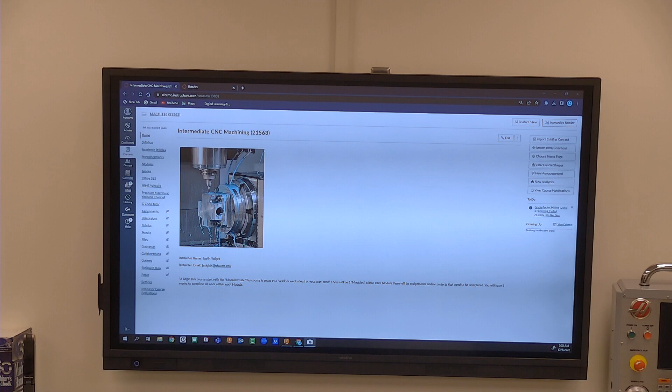For 118 today, we're going to be working on Module 4. This is going to be the legacy milling, and I will have all of your modules for the rest of the semester out today. So in this module, I've given you a Fusion file, a regular STEP solid model file, and then I've given you a DXF file that you can import into AutoCAD or anything, and it's just kind of a little more stripped down.

So if you've already had some type of CAM class, then this program becomes really easy for you. Whether you're in Fusion or in Mastercam, you can import this directly into that program. Chance, have you had Mastercam? Okay, have you had anything in Fusion? Okay. Then we'll go through some of that stuff together.

What I'm asking you to do is import this model into Fusion or into Mastercam, and then you can create the program off of the machining operations that are here. Okay. But remember, we only have 2 weeks left of class, and that's really less than 2 weeks. Okay. This is a primarily mill part. You need to be working on this part while we're working on the other parts.

Today, we'd like to go ahead and start putting some holes in our other part, right? So you actually have 2 parts. 1 part to make 6 flats on, and 1 part to make 3 NPT holes in. Correct? Okay. So you're going to create a taper gauge with handle for this part. This is the part.

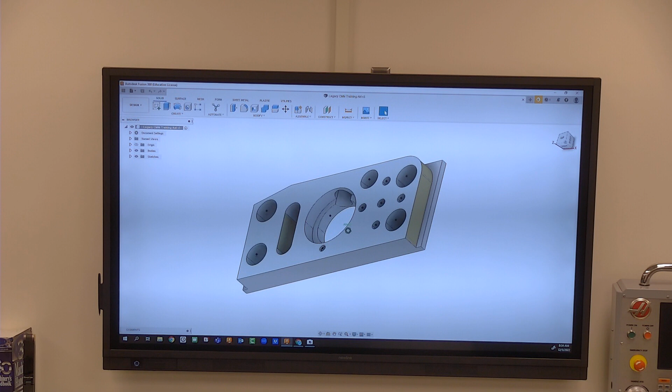And it is about 9 inches long. And so you'll mill all the way around it. It's got a side hole that comes through it here. This hole right here is tapered. What I want is something similar to a go, no-go gauge that has that correct taper on there, which you'll turn on the lathe.

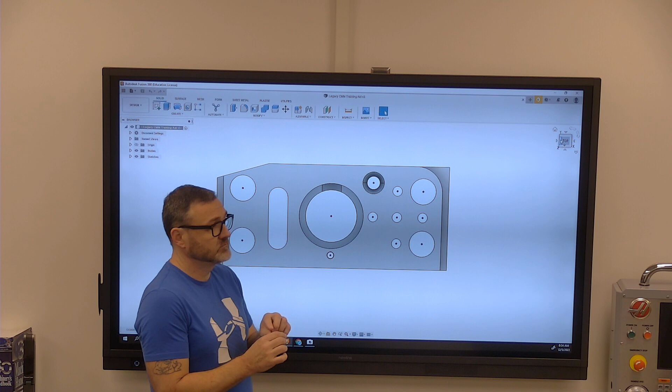I want you to make it out of one piece. You can knurl the handle. It could be tapered, and then it could be undercut, and then have a handle on it, however you want to make it. It needs to be something usable. So it's for Jacob's class next semester to use as a tapered gauge.

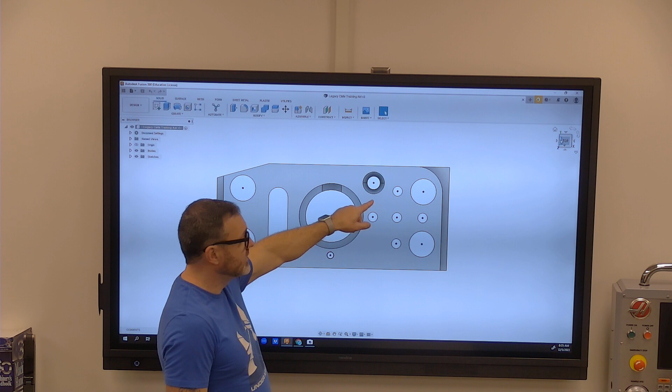Okay. So here's how I would do this: I would make sure that when the taper is correct, the bottom of the gauge fits flush at the bottom of the part. This is how you know it's right. You'll know that bore is too big if the gauge sticks out the bottom. You know the taper is too small if the gauge doesn't go all the way down to the bottom. See what I'm saying?

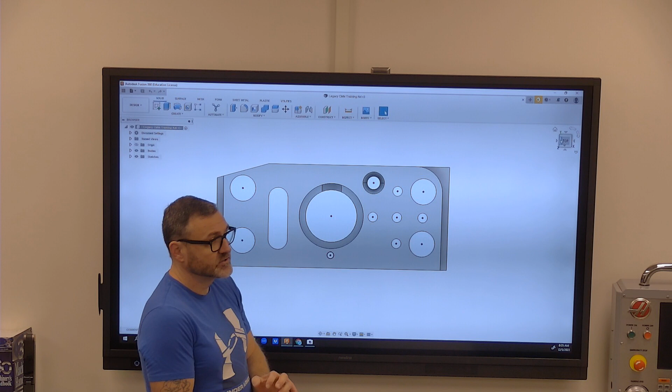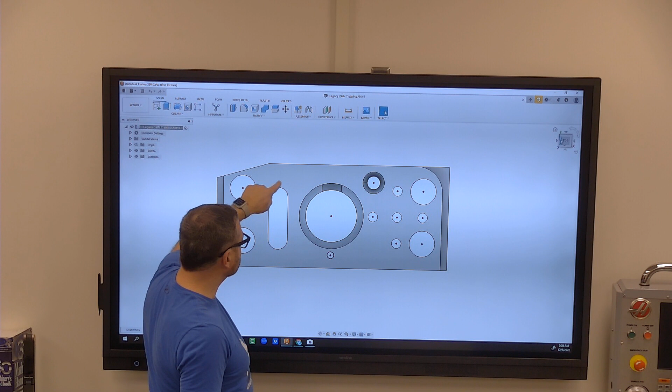So with this part, there's really not a lot there. It's just a lot of holes, is all that it is. Okay, so you're gonna have a part, and like I said, it's about 9 inches long. You're gonna mill some steps and a little curve right there. Square the outside, mill this angle. Then you've basically got holes, 4 holes that are the same, 4 holes that are the same, a slot, a through hole counterbore, another hole here, stand it up on its side, and do this last hole.

Okay. I think the part is about 900 thousandths thick. I would try to take material off both sides if it were me. You can get away with just taking the material all off of one side on this part if you want to. Okay. So I think this part's going to need, you've got to do it in 2 setups, right? There's just no way to do it in one singular setup because you have that one side hole.

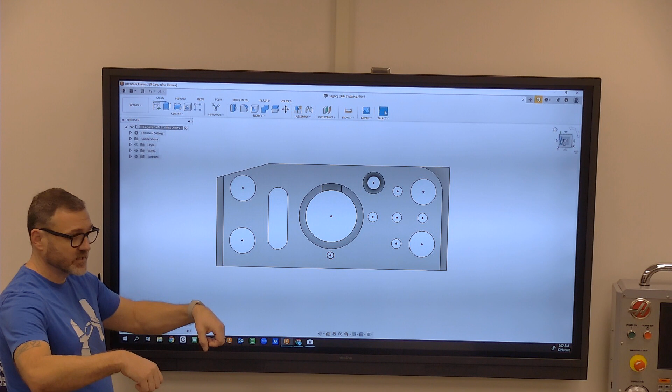Unless you build a plate to put on the 4-axis where you can rotate it up and pop that other hole in it. See what I'm saying? So you come out of that 3-jaw chuck, and basically you have a rotating plate, and so you mill the whole thing on the plate, rotate it up 90 degrees, drop that hole in it.

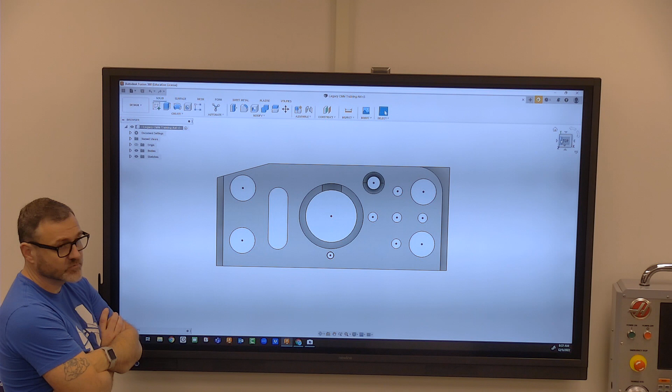Okay. So I think what we'll do today, we'll focus on getting our A-axis stuff going. And then, Eden, you can do yours in Mastercam if you want to. I'll probably just help you guys through some Fusion stuff to get that going, okay? Because I want you to do a little bit of CAM stuff in here, just because it's going to be a little easier to do, really. But it's a little bit of a learning curve.

What do you need, or are you just distracting? I'm just in here. Okay. I'm taking like 300 thou out per cut, but it's slow. Slow, yeah. Got the grinder running? Do what? Got the grinder running? I don't have any more parts to grind. Okay. Got your lathe parts done?

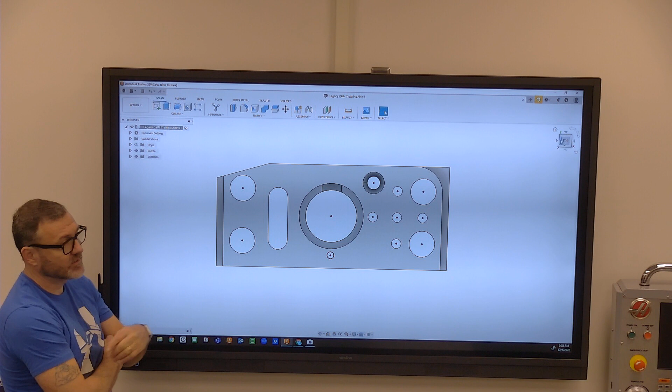Do we have material for, well, I probably still need, I only have to do the screw. Screw. Okay. Yep, screw's just mild steel. So there should be some 1 inch on that. I may have some bushings that you can put in the end of it, so you'll have some Oilite bushings to run on the ends of it. Have you already got your holes done on the ends? Okay. So we can do those then. Okay. I gotta do these guys, and then I gotta do the Jacobs, and then I'll grab you.

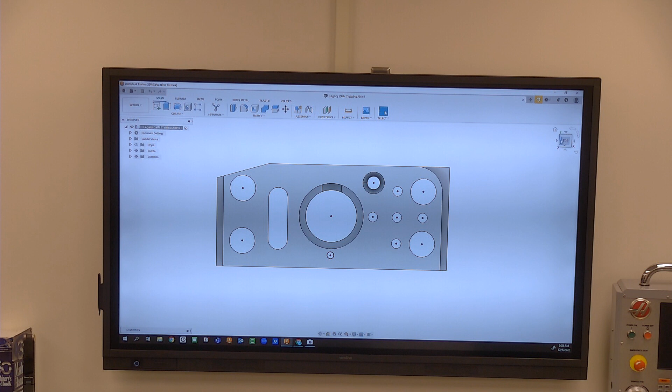All right, so let's talk. So this is the next module. Okay, so Eden, this is probably the easiest part for you. So create a taper gauge with the handle, create the CNC program using either CAM, conventional, handwritten code, or a combination of both. Finally, machine the part. Submit all prints, programs, and parts. A submission box is provided. Okay? So, pretty straightforward.

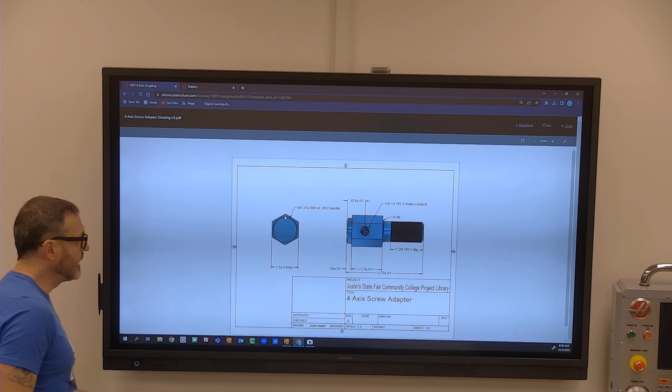Let's go back to our modules for Module 3. And the first one to work with is this guy. And we already came up with, or we think that we may have come up with, a scrap part. William was sure that it wasn't his. He assured me that he only makes good parts. So if we have a scrap part to make for our first part, it must be one of your own.

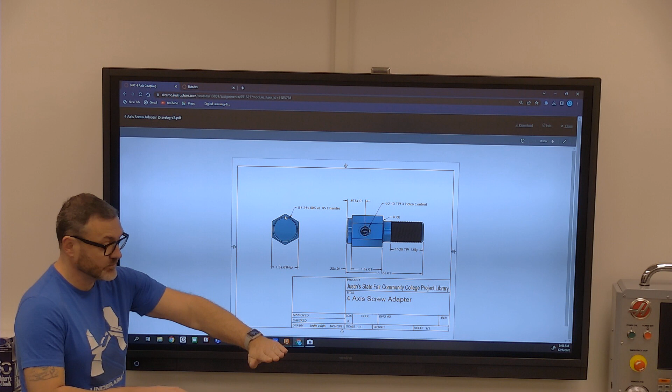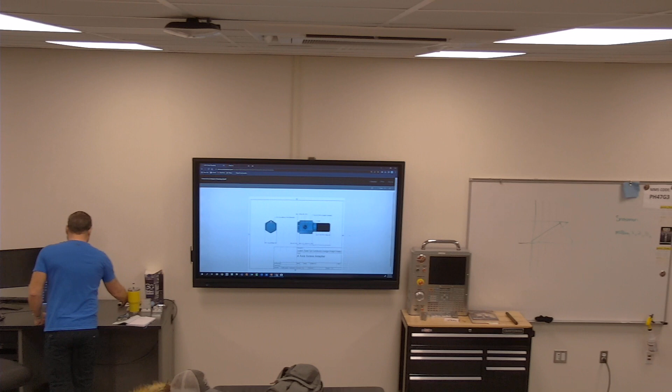So all we're going to do is we're going to put this part in that 4-axis chuck, okay? And then we're going to basically mill a flat. I would actually probably do it like this. Let me back up a little bit with the camera. You're going to put your part in there like this. This would be the threaded part. And you want to leave it outside of the jaws some. So something about like that.

Where do you think that X0, Y0, Z0 would be on this part? Very end. Yeah. So X0, Y0, Z0, top of the part. Be fine. You can also do it in the middle of the part. It's the same all the way across. I don't think it matters. So here's all that I would do. This is so simple, it's just ridiculous. Face mill pass, rotate, face mill pass, rotate, face mill pass, rotate. That's not how I was gonna do it, but that makes sense. It was super simple. Okay.

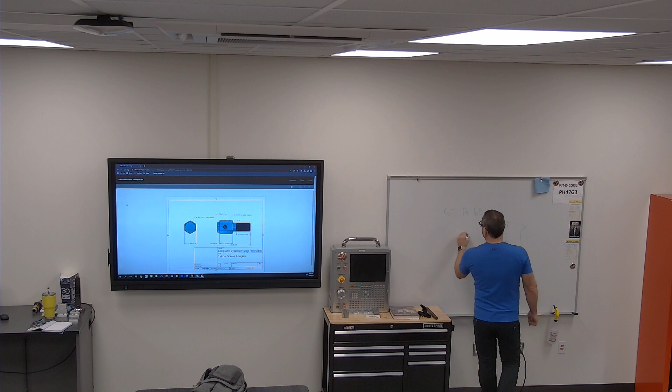Let's just say this is 150 thousandths arc. Okay, the arc of that is the chord. Let's just say this part is 150 thousandths. I would make this Z0. So I would go touch the top of my part and move down 150 thousandths, part 0 set. That way I can mill to Z0, and then after my flats are there, all my Z moves are negative after that. Oh, that would be when you're drilling?

Yeah. Okay. So then this part right here is then 850 thousandths from here to here. And so then I could run my drill down to the middle at 850 thousandths or whatever, however I want to do it. You can do that one however you want. If you do the center of the part at 0, you got to remember all these motions are positive. If you do the top of it, all the Z motions are negative. Only 2 differences between those 2 things. So that should not be an issue.

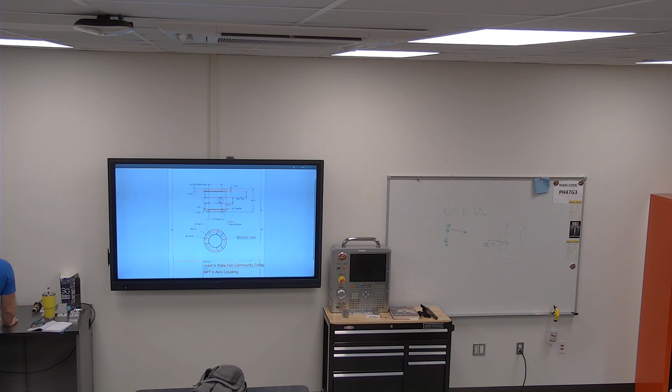All right, let's look over at your other part. So this one's real simple. You're just going to chuck it. Will any of the other modules require us to make a print to do what we're doing on this one right now? Other than the legacy one? So they're back to straightforward. Yep. Yeah, the legacy one's the only one I want you to do that on.

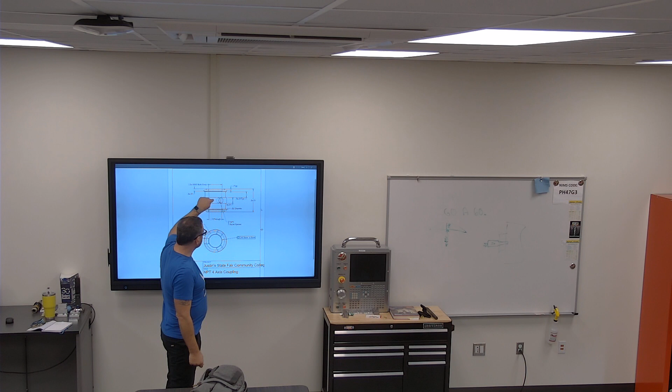Okay, this part, what do we need to do for it? Just rotate it and drill it, right? So it's going to be really similar, right? The only thing that we have to pay attention to is we're going to still do our same 3 rotations. Say X0, Y0 is one of these, Z0 is on the top or the middle, however you want to do it. You drill through it, rotate it, rotate it, rotate it.

Now here's what you're going to have to do on this one: your tap, since it's tapered, has to go to a certain depth. Oh, so it fully engages the threads. Right. Because remember that gauge I showed you with the flat on it? Mm-hmm. That's how you know when it's there. You get plus or minus a thread from the flat. So the threads don't go all the way to the center? Threads don't go all the way down to the middle. Okay. So that means you're going to have to do some calculation on the tap.

So there's a really easy way to do it. Let's say this is Z0. Thread it down 100 thousandths. Check it. If it's not right, thread it down another 100 thousandths, check it. You're like, okay, so I got 3 threads left to go. Say it's 14 threads per inch. Take 1 divided by 14. You'll know what each one of those threads goes to, right?

So like 20 threads per inch is 50 thousandths every revolution that it goes down. So if you can count those threads on that gauge, and you're like, I need to go 3 threads deeper, then you can know what each one of the threads are, and then go down 3 threads deeper. Okay, so if each one of those threads is 62 thousandths, then you need to go down 3 of those to get down to where you need to get to. See what I'm saying? Okay.

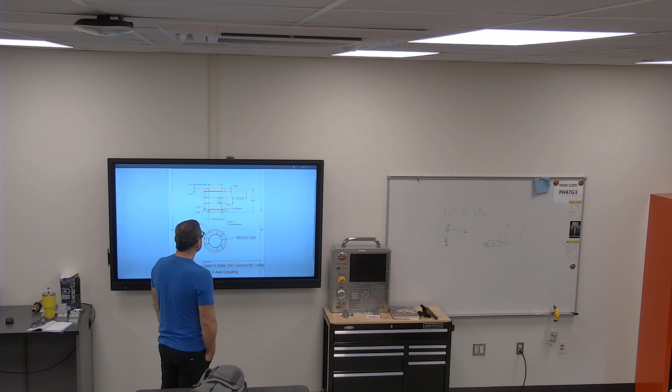Now, here's the only hiccup on this guy: there is not a way to hold on to this. So you gotta make something to hold on to this thing with. Shove through it. Yeah, so what I would do is find myself a piece of stock about 2 inches in diameter, and I would turn a diameter. We ended up going 1.2 on the through hole, I think. Is that what we ended up doing? Yeah, 1.2. So turn that outside diameter of that spud to 1.2.

We slide our part over it. This part is 2 inches long. We make the turned part 1 inch 900. You with me? That way it doesn't go all the way. And then we make a plate on the front of it. We tap a hole in the front of it, half 13. We put a plate on the front of it with a clearance hole for a half 13. And so we slide our part onto that spud, put the plate on there and then screw it on, and it pinches it in.

And then we'll be drilling into that spud. But then that spud works for all 3 of them, because you all need to make your bores the same. Okay. And so we've modified the print to be all 1.2 for the diameter on the hole. And so you just make them all so that they're 1.2. You make that 3 or 4 thousandths smaller. Just let it slide over it, and then it just becomes the one that you use for it all the time. All right? So like in the future, if I have other students make this, hey, here's this fixture that we already made to do this.

And then you just throw the trash right in front of them. You go, okay, now you can. Now you make one. Yeah.

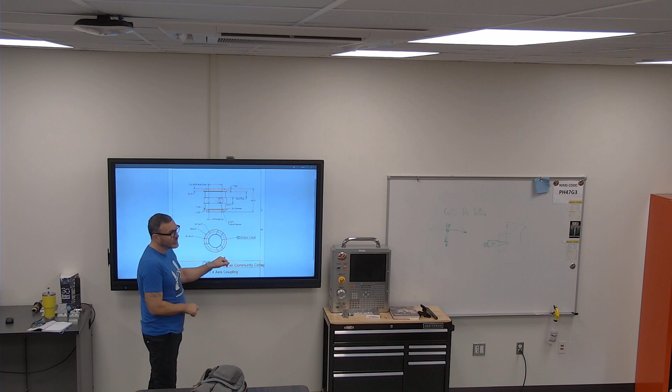So we want to sort them first, because I was thinking I would do all the lathe stuff, so anything that has a lathe application, do that and just save 4-axis stuff for next week, instead of taking my finished part right now and going in the mill and finishing it and turning it in. Since I'm already on lathe, I can do all the lathe stuff and start programming for the other modules. Yeah, so go ahead and work on your taper gauge today. Should I make that on a manual or just CNC? I'm making it on CNC, the CNC class. Makes sense. You can make your fixture too.

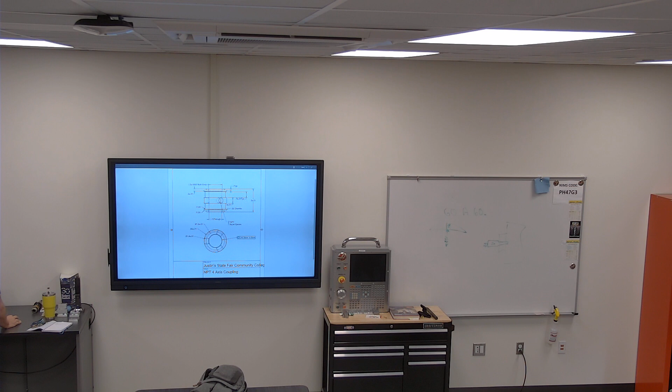And where do I get the taper measurement from? Is that on the print that he measured and used? Yeah, so. That's our scrap part, test part. This is my finished product. Here's my radiuses right here. Those chamfers with the radiuses. Oh, nice. So I'll give you the dimensions off of this part if you want them. Here's the radius at the top of this hole is 418.

Nope. Radius is 250 or diameter is 500. So then you just do some math to find out what the taper would need to be between those 2 points. And then the part is 950 thousandths. Oh yeah, on CNC you just list both points, you don't even need to. You do not need to, yeah. The math is just easier for you, right? I can knock this thing out easy.

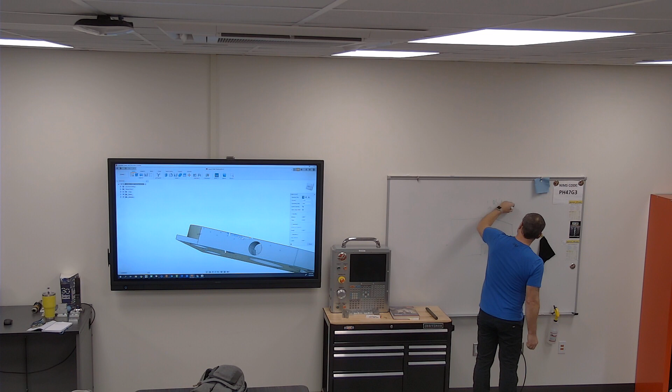Yeah. So on that part, I would probably just face off and then, like you said, two points. One roughing pass, finish, and then you're done. You're sitting at 10 minutes. Like 30 minutes. So I'm gonna make something that goes like this. And maybe here I put a little undercut, a little groove or something, and the rest of my handle. You don't have to, though. I mean, so make this 950 long. And then you've got your diameter here, your diameter here.

Do you want it knurled? Have we done it on CNC? No, but I've got a really sweet knurling tool, if I can find it quick enough, that you can use to do that. You could put some little grooves across the outside of it. Put my name in it. I don't know that you could do that. But you could put a couple grooves around the outside of it. You could leave it straight turned. You could knurl it. Do whatever you want. A really nice spring-loaded knurling tool that works really good with that. What's the knurling code? You just use G71 without it?

You're just going to use G1. So just run it across, let's just say you turned it down to an inch and a quarter diameter. On the manual, we just kind of pressed it in so it felt right. Is there a specific depth? Yeah, so I just go about 10 thousandths deep on it. 10 thousandths, okay. And it's got a top and bottom roller, spring-loaded. Where should you start, off the end of the part, go 10 thousandths deep and run it across? Yeah, you can. You can start off the edge and go across it.

What I normally do is, just like I would a normal knurling tool, I bring it right down on the diameter and then feed across it. So I don't go that way with it. I go into it and then feed across it. I'm probably going about 150. And then just flood coolant on. Don't have to use oil or anything. It's really slick though. So that'll be it for that.

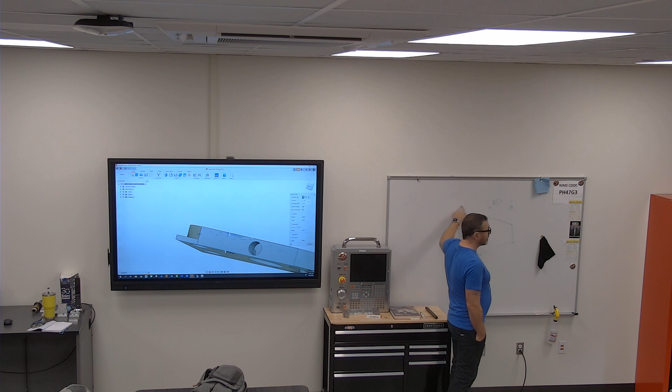So it's got to be enough that it can get all the way down. You can't go like 950 and then go up higher there, because it'll only measure the gauge if it's perfectly right. So you've got to give yourself the ability to be gauge worthy. That finish will need to be nice and smooth and slick across there too. But you can make it out of aluminum; it'll be fine. If you're just working on lathe stuff right now, that would be the thing to do. If you haven't got your part made, you need to get your part made.

If you're ready to get started on the legacy part itself, or want to start on the 4-axis stuff, Brian might be over on that machine. You could probably talk him into moving somewhere else. You said one 4-axis machine? We only have one 4-axis rotary. Is the 5 one? The 5 can do it too, but it doesn't have a chuck on it right now. You'd need to put a chuck on it and flip it over, and then you can do it.

It's probably easiest, since there's only 3 of you, to just call out tomorrow, hey, we need this machine for these guys. But you can't not run it, you know what I mean? Total butt move to say we need this machine tomorrow, and then no one runs it, and you're like, we actually didn't get to it, I got deep in Minecraft and did not get anything done.